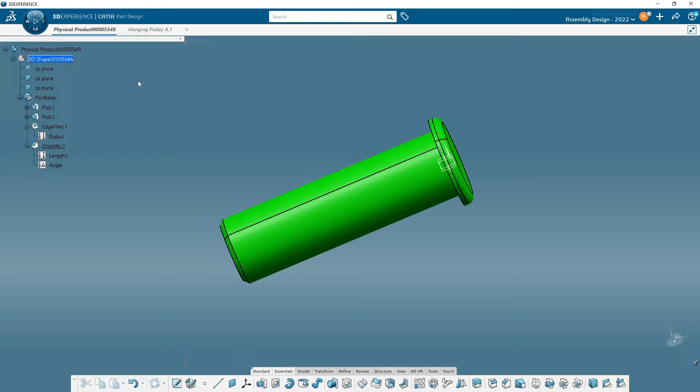The next one we're going to do, let's open up another tab here, is going to be the nut. So go ahead, we'll pick any one of the planes that you like. We'll go here, get that arranged the way you like it, and then come down here and find your polygon tool. And I'm going to go ahead and click right smack in the center, bring this out like so.

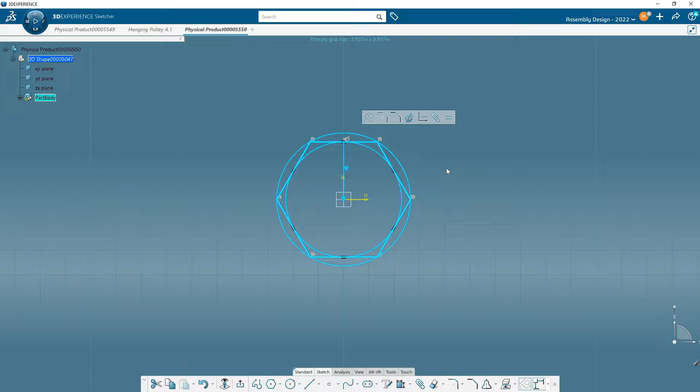I like to usually bring this straight up because you see this line. I didn't mention this before any time we've talked about making nuts, I don't think, but you notice how it snaps to the vertical right there or snaps to the horizontal. It gets rid of one degree of freedom that I don't have to sort out later. So it'll snap right to there. And now I could still shrink it, but I can't twist it.

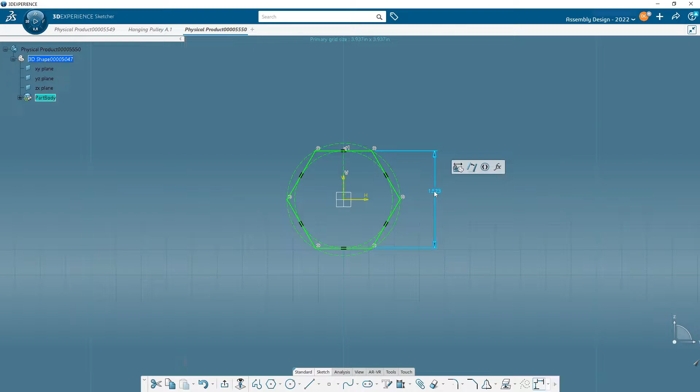Okay, so we're going to measure from flat to flat here. That is typically what makes the most sense because this is going to be a nut and there's going to be a wrench that goes on this, and the wrench and the nut are named by this distance right here. So it's a 1.125 wrench. Here, let's go take a peek at that real fast. 1.125, so 1 1/8 inches.

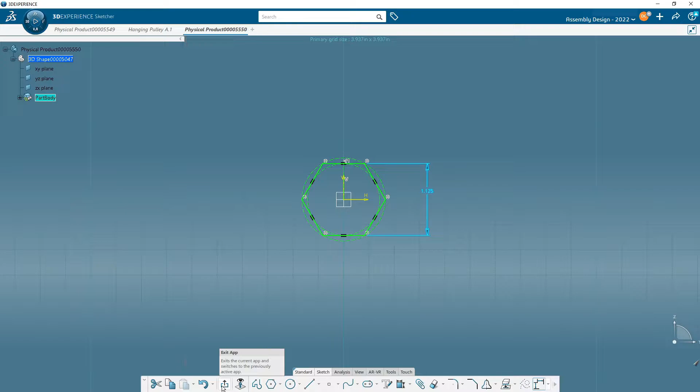Okay. There are some cases where I've needed it to be basically the diameter of this outer circle, or from point to point, but those were some odd cases. Normally when you're going to make a hex nut, the width matches the wrench that's going to be used with it. Okay, so we'll exit out and we'll pad this up 0.4 inches, just like so.

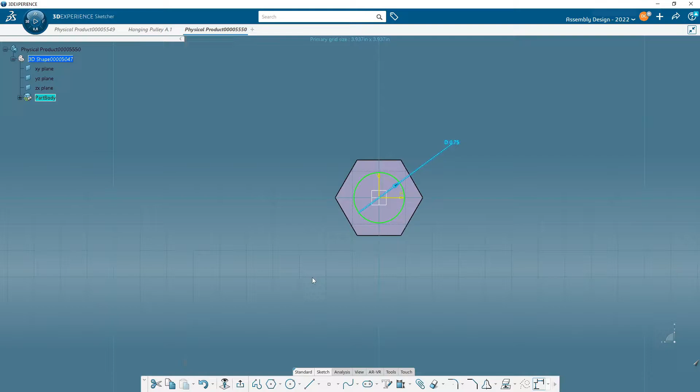And then I guess we'll put the hole through here. So again, you could put the hole on this face, or you could go on this face, or you could go on this plane. Continually think about which is going to be the best way to do this. Flip that around. And again, we're going to make this dimension 0.75. Exit out, extrude this through, pocket, up, through, up to last.

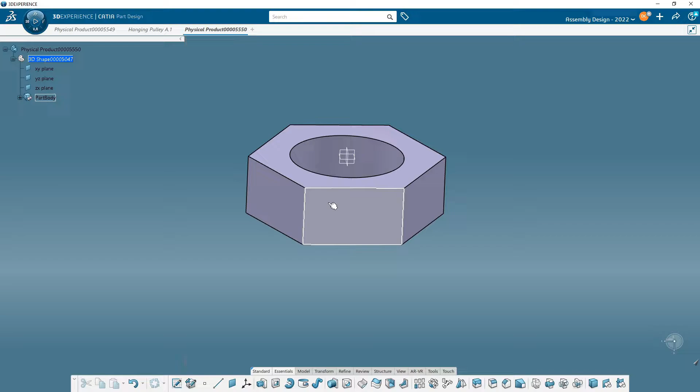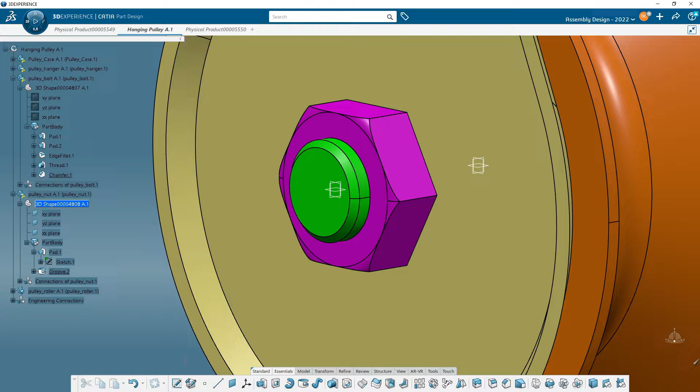Okay. Now, the last little bit that we're doing on these nuts all the time is adding this little bit of bevel that goes around the outside here. And I thought I should talk about this a little bit more. It is pretty common on all the nuts. For the modeling to be dimensionally accurate, for you to look at your pulley over here and see if everything's going to fit, it doesn't necessarily have to be there. And you notice on this one here, I decided to just add it on one side, and that's kind of just a choice because I've seen nuts that fit and sit this direction here.

Yeah, let's pause that.

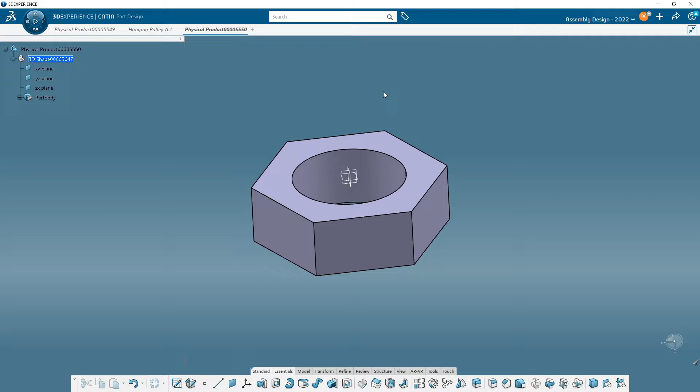Now, typically when we're designing nuts, us specifically in these courses, we end up adding this chamfer that goes around here. And I thought I would like to talk a little bit more about what we're doing here and why. So first off, the why: it's basically because that's the way it comes out when it's manufactured, and we want it to look that way. Dimensionally, I can't say that having the chamfer or not has affected my fitment of anything. I haven't built a product and went, oh man, it's off by so much because I forgot to put the chamfer on the nut. So it has nothing to do with the dimensional accuracy of the entire assembly. It's mostly about looks.

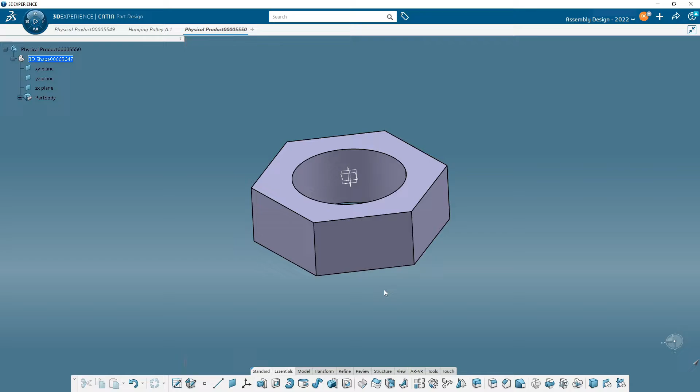Now, getting past that and saying, okay, how do we want to make it then? If you look at this, they're pretty much all the same. You see that we've got this circle right here that's touching the flat walls. So if you think about it, the diameter of that circle is the same as the width from flat to flat, what we did previously. So it's 1 1/8 inches.

Now, this next part, I'm going to take this opportunity because it's such a simple part to explain in a little greater detail why we do things a certain way. For example, why did I pick the plane that shows me the longest side, from this side to this side of the nut, as opposed to going on to this plane that shows it in this direction? Why did I choose that? So let me hit normal view to flatten me out.

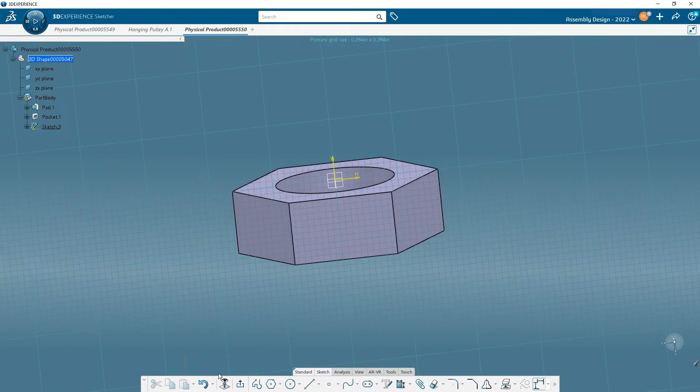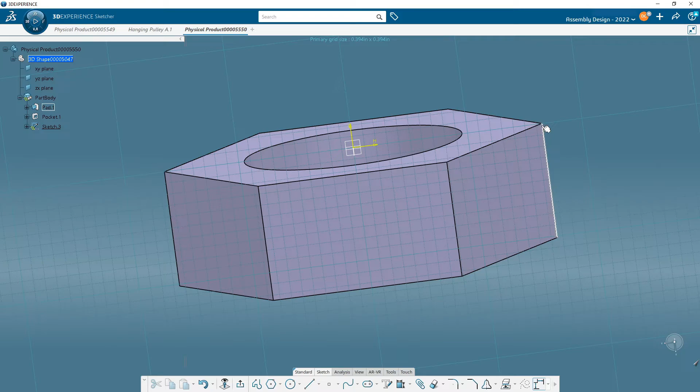So what I want to do is make a little triangle over here that's going to make the chamfer. If you recall, we make a little triangle and then we use the groove tool to spin it around the central axis to cut that chamfer for us. Now, remember the circle I was just showing you on the inside that's the same diameter as from flat to flat. If I draw my triangle the right size here, it will spin around and essentially cut nothing right here, and then start cutting just these corners off. Okay. If I look at it from this side, I need to make some construction lines. So this is also a talk on construction elements.

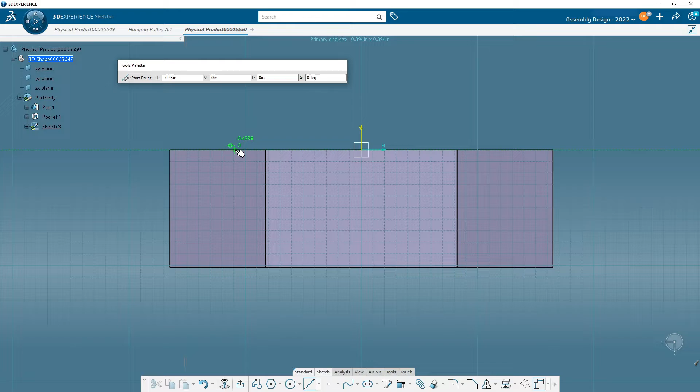So let me draw this, and then hopefully this will begin to make more sense. I'm going to draw a line on that horizontal line to right over here. Click, and I'm going to make it a construction element. So I've got a dashed line. I'll tip it down so you can see this.

Now, I'm going to click this point here, and I'm going to hold down Control. You don't have to do this, but this is the way I do things sometimes. I'm holding down Control to pick the 2 points, and then I hit Constraint, and it gives me my dimension. A little bit different way to do it than you see me do it normally. Before I click, I'm going to right-click and choose Allow Symmetry Line, and get that vertical line right there.

So what I've just accomplished now is making this line be symmetrical right across that center vertical. Great. Now I'm going to dimension it, because this is my guide. I'm going to dimension it to 1.125. So now this is the same width on the long side. So I'm on the sketch plane with the long side of the nut, but this is the same length as it is from flat to flat.

So now I'll draw the triangle out. Make sure you don't accidentally stick to, watch out for your auto constraints. I probably don't want this right at this moment, but I want to bring it out here for explanation. I want this to be right here. I want that point touching right there, and I want this flat touching right there, because that's going to define the triangle that I'm going to use to cut that corner off.

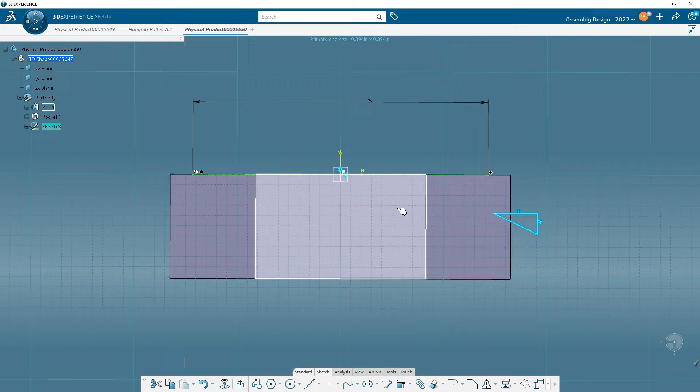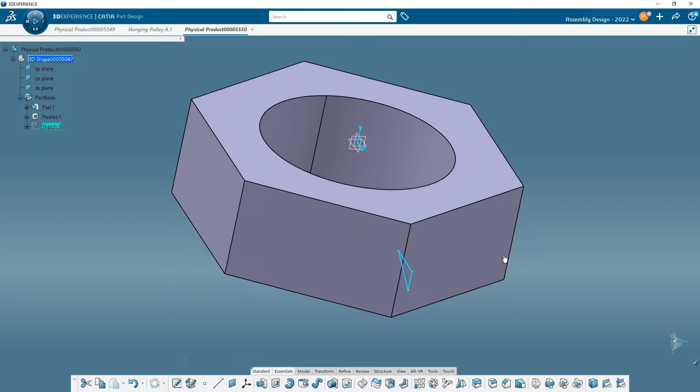Now, if you wonder why I picked the long side, let me exit out and show you this. I know right now how long it is from flat to flat, 1.125. I don't know how long it is from point to point across here. I absolutely could measure this and it would work fine, but maybe I just plain don't want to.

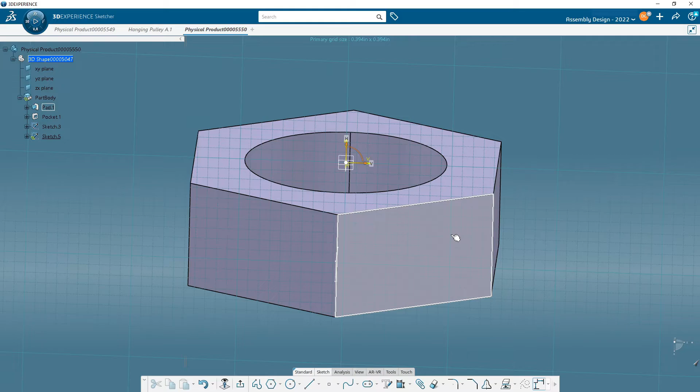So if I were to pick this plane right here and go into Sketch, this distance from right here to here, I could project these out. That distance is 1.125. That's the flats. So I would have that line that I just drew already. I wouldn't have to draw it. I would have the projections right there. What I would have to draw, though, or measure, oops, that's what happens when you don't set your axis system up right. The little bit of the sharp, the longer side there, I'd have to figure out what that is to get the triangle stuck to it.

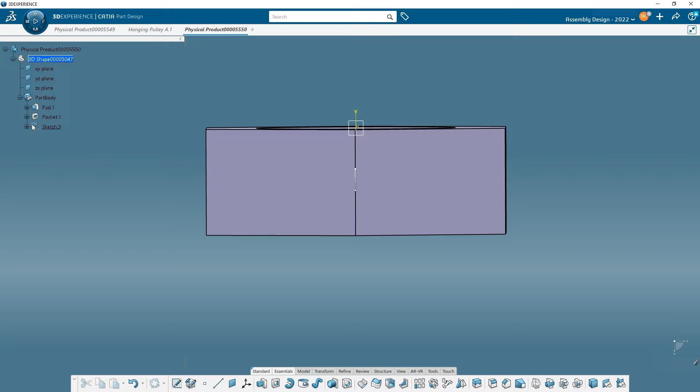So again here, if I just tip it up like this, here's the long side. If I'm looking at it from the short side, the end of my triangle I need to have measured to that long section. Okay, so let me go back to the sketch. This is why I want to be on the long side, because now that I've measured out the value I do know, 1.125, and put my construction line there, now I can pick this edge right there, project that forward as a construction element. I didn't have to measure.

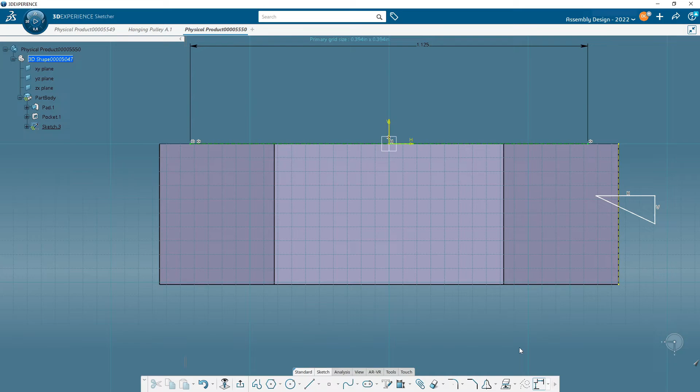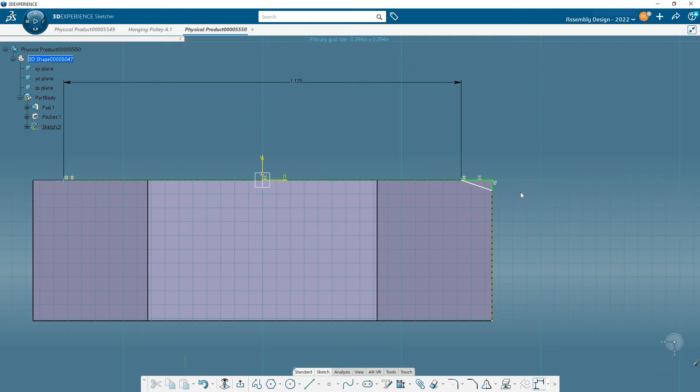This is the length I was talking about. I don't know what this is from edge to edge. And so without having to measure it, I go on this side, I project that out like this, and now, watch, I'm gonna get rid of this triangle. I'll just redraw it. Now that I have that point there as a guide, it becomes a lot easier for me to come in here and pick that point there, drop down here, go right there, and there's my triangle. It's all perfect because I have these nice guides right there for me. I didn't have to go measure too much.

Now, for the last part of this, the depth, we do have to kind of guess at that. So we'll go here, we'll pick this, and how about we say 0.05. That might be too much, but we'll roll with it. So I hope this little side journey gives you something to think about as you're making your parts and choosing which plane to go on. Try to do your best to think a step or two or three ahead of what you're doing to try to make the smarter decision.

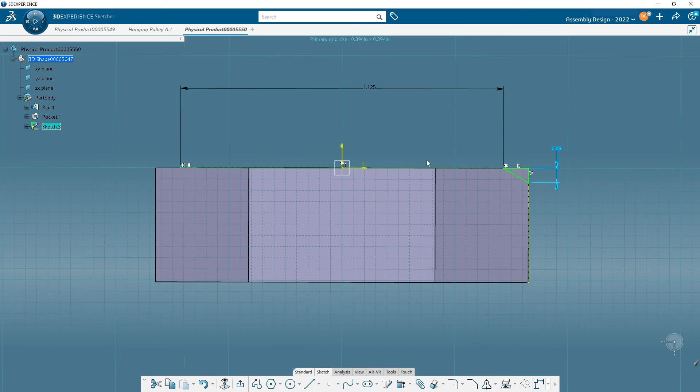Okay. So we'll go ahead and exit this out and we'll get this nut finished. So there's that part right there. Come down here to groove. It already picks the sketch because it was already selected. I'll hit the axis selection. I'm picking this side edge here, which gets the cylinder, and we'll spin that around 360 degrees, and then we have it.